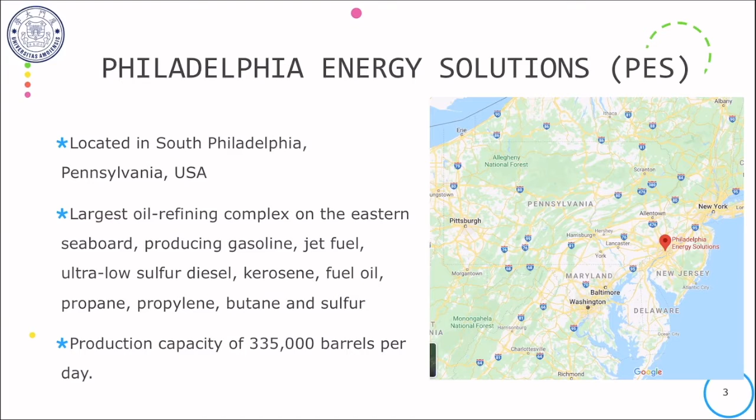Philadelphia Energy Solutions, in short PES, was located in South Philadelphia, Pennsylvania, United States. PES owned the largest oil refinery complex on the eastern seaboard, producing gasoline, jet fuel, ultra-low sulfur diesel, kerosene, and many other petrochemical products, with a nameplate capacity of 335,000 barrels per day.

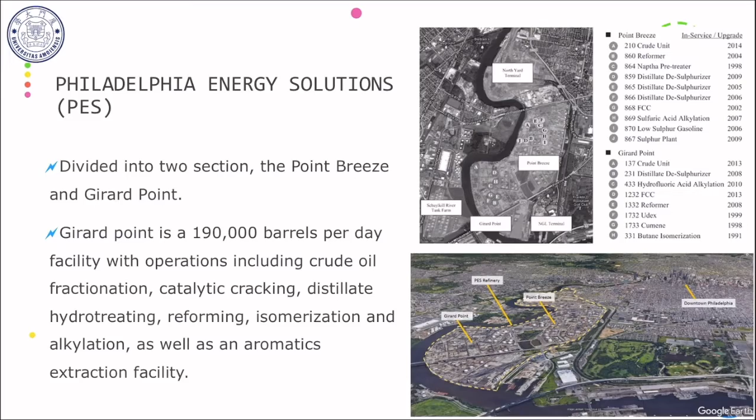This hydrofluoric acid alkylation unit is used in the petroleum refinery to convert isobutane and alkenes into alkylates, which is used to make gasoline. In brief, propane, butane, butylene, and isobutane from the upstream processes will be sent to the treater feed surge drum V1.

Before being transferred to the alkylation unit, the feed will pass through the caustic scrubber and deethanizer to remove hydrogen sulfide and ethane. Once in the alkylation unit, the alkenes react with isobutane in the presence of hydrofluoric acid catalyst, creating alkylates. Alkylates and remaining hydrocarbons separated from the hydrofluoric acid catalyst in the hydrofluoric acid settler will then undergo downstream refining.

Overhead of the depropanizer containing propane product and hydrofluoric acid are condensed and separated in the overhead depropanizer accumulator. A section of hydrofluoric acid containing propane is returned to the column while the remainder is stripped free of acid in the propane stripper. The bottom of the propane stripper is acid-free propane product, which is treated with hot alumina to remove organic fluorides.

It is then cooled and treated with potassium hydroxide pellets to remove traces of hydrofluoric acid and water. The distillate and section of alkylates and hydrocarbons from the hydrofluoric acid settler will then enter the isostripper. Overhead isobutane and propane will be recycled for alkylation, while the bottom will enter the debutanizer to separate alkylates and butane product.

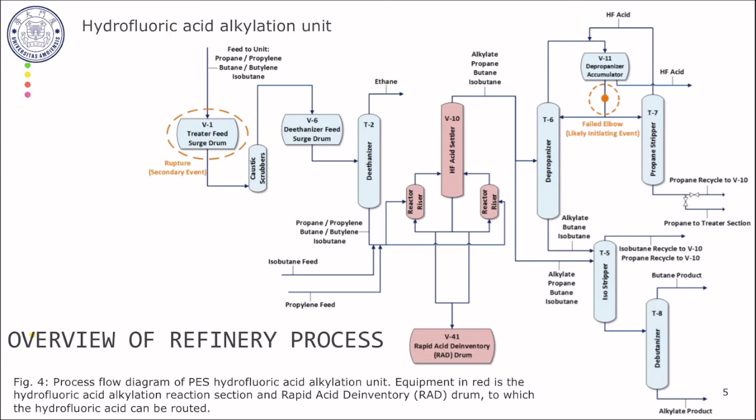On June 21, 2019, at 4:02 a.m., during the plant's normal operation, a major process loss of containment caused a fire and explosion at the 433 hydrofluoric acid alkylation unit in Girard Point.

Post-investigation shows that the rupture of the elbow between the depropanizer accumulator and the depropanizer distillation column appeared to be the initiating event causing the process fluid release. This fire raged for more than 24 hours, releasing 5,239 pounds of deadly hydrofluoric acid into the air.

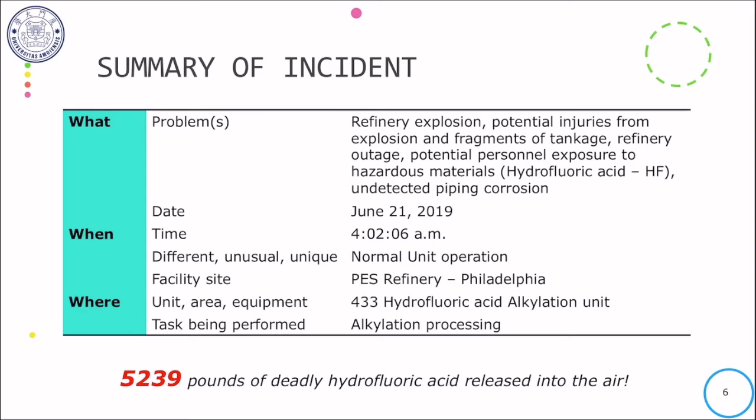Next, I will explain the incident timeline in detail. This explosion incident timeline was summarized in the table here. During the early hours of Friday, June 21st, the hydrofluoric acid alkylation unit was reported to be operating normally.

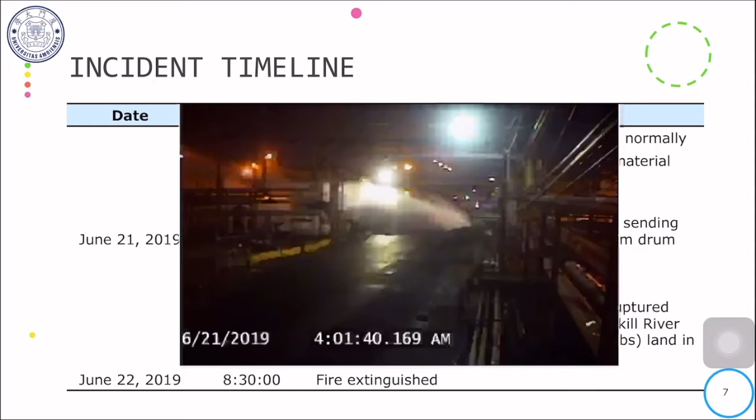Right after 16 seconds past 4, there was a sudden loss of containment causing flammable process fluid containing hydrofluoric acid to release from the PES alkylation unit, forming a ground-hugging vapor cloud. At 4:02:06 a.m., the flammable vapor cloud ignited, causing a large fire in the alkylation unit.

After 30 seconds, the control room operator activated the RAD system, which de-inventoried the bulk hydrofluoric acid from the hydrofluoric acid settler to the RAD drum.

At 4:15 a.m., during the ongoing fire, an explosion occurred in the alkylation unit. A second explosion in the unit then occurred after 4 minutes.

At 4:22 a.m., a third and the largest explosion occurred when the V1 treater feed surge drum, containing primarily butylene, isobutane, and butane, violently ruptured.

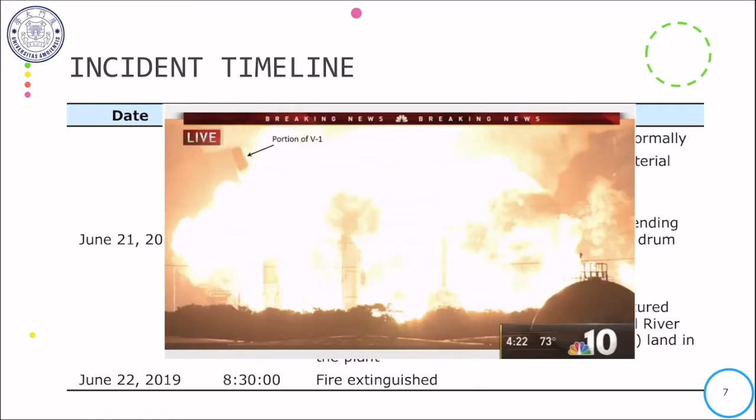A fragment of the vessel weighing approximately 38,000 pounds flew across the Schuylkill River, and the other two fragments, one weighing about 23,000 pounds and the other about 15,000 pounds, landed in the PES refinery. This appeared to be a secondary event caused by the fire.

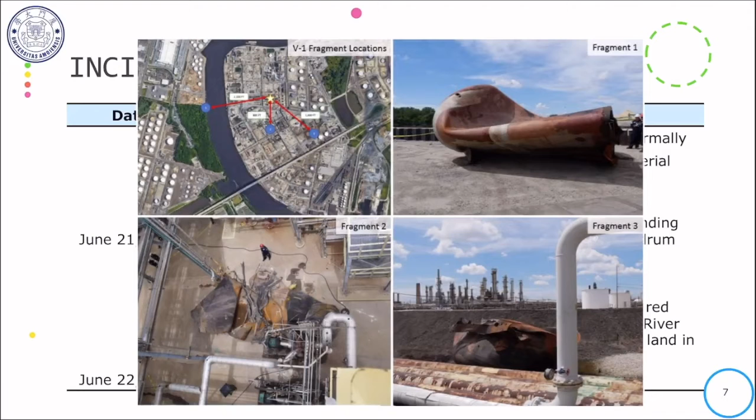The fire was extinguished the following day at about 8:30 a.m. This photo illustrates the actual scenario during the incident.

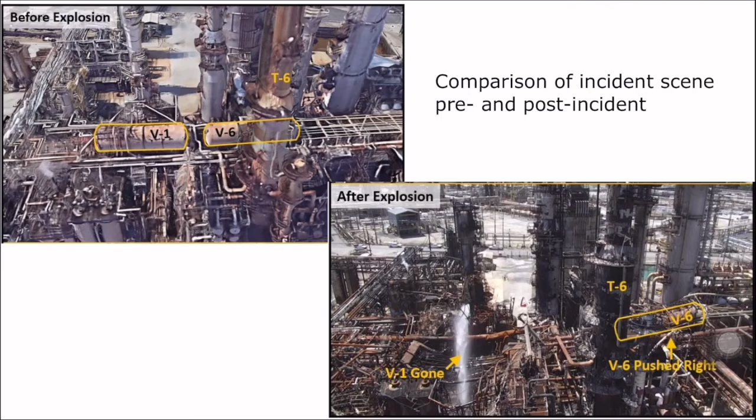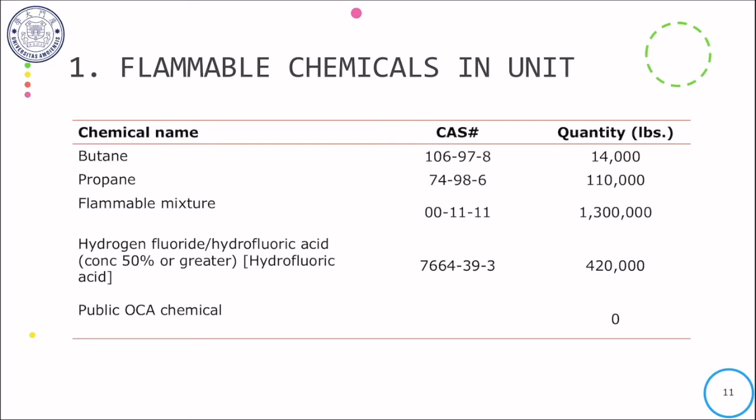Following that, I will share with you our findings on the technical details of the unit operations in the incident. The table here shows the chemicals involved in the unit sections, indicating that flammable chemicals are present in the unit. Prior to the incident, a latest hazard review was conducted on June 28, 2017, and the hazards identified and installed safety features on the unit sections are shown here.

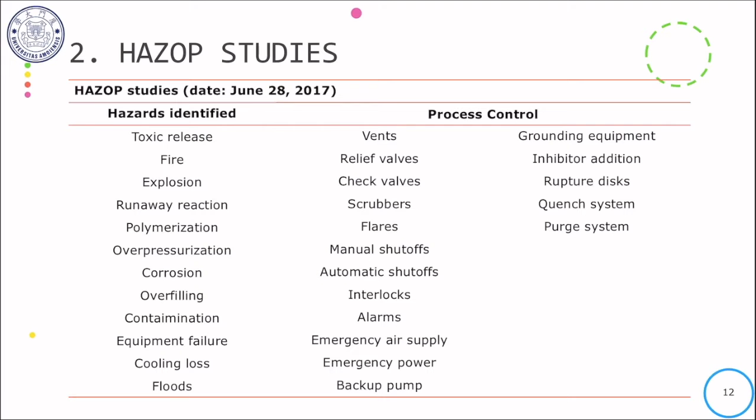Investigations by the United States Chemical Safety Board say the Philadelphia explosion occurred due to a corroded pipe elbow in the refinery alkylation unit. The elbow was part of the piping between the depropanizer accumulator and the depropanizer distillation column. During the incident, the piping was operated at a pressure of about 26.2 bar and a temperature of about 37.8 degrees Celsius. Approximate design compositions of the process fluid in the piping contained 94.7% propane, 2.5% hydrofluoric acid, and 2.8% additional hydrocarbon.

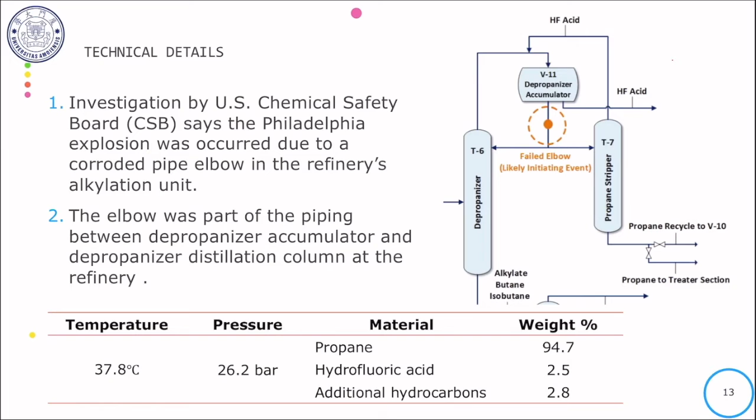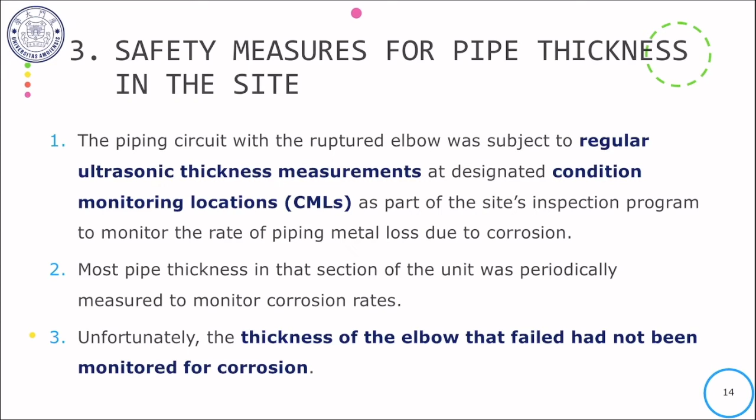Regarding safety measures for pipe thickness at the site, the piping circuit with the ruptured elbow was subjected to regular ultrasonic thickness measurements at designated condition monitoring locations (CML) as part of the site inspection program to monitor the rate of piping metal loss due to corrosion. Most pipe thickness in that section of the unit was periodically measured to monitor corrosion rates, but the thickness of the elbow that failed had not been monitored for corrosion.

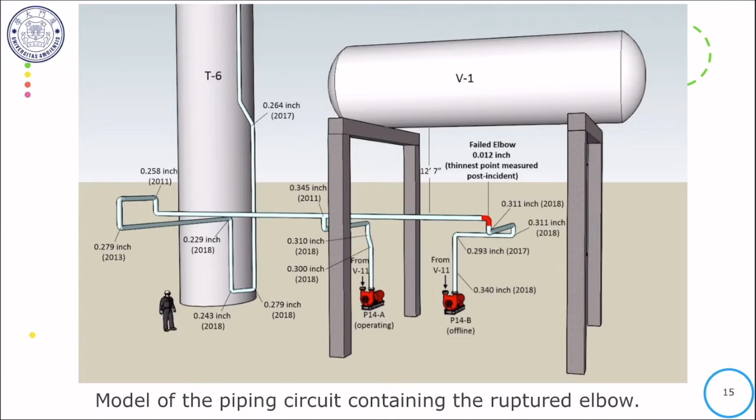This figure shows the model of the piping circuit containing the ruptured elbow. The most recent thickness measurements at designated CML locations are shown, along with the year of each measurement. At the time of the incident, the elbow was on the discharge outlet piping from a pump that was not operating. This figure also illustrates that the treater feed surge drum was directly above the ruptured elbow. The ruptured pipe elbow was found after the incident.

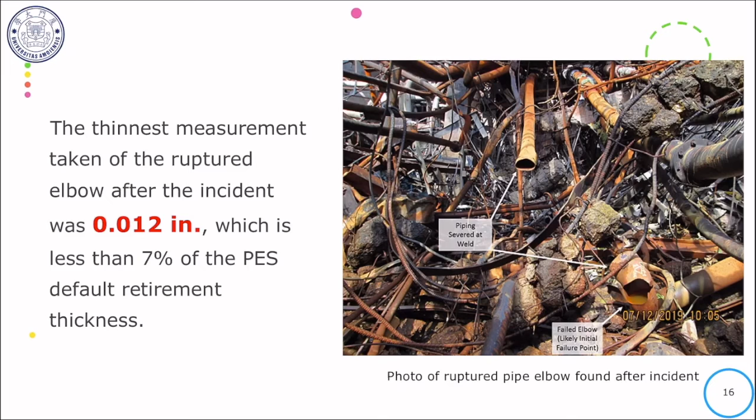The thinnest measurement taken of the ruptured elbow after the incident was only 0.012 inch, approximately 0.3 mm, which is less than 7% of the PES default retirement thickness.

Detailed investigation on the ruptured elbow by CSB shows that the piping circuit containing the ruptured elbow was installed in 1973. The piping circuit was constructed to meet the 1965 version of ASTM A234 grade WPB material specification. ASTM stands for the standard specifications for factory-made wrought carbon steel and ferritic alloy steel welding fittings, while WPB is a steel grade in which W is weldable, B is grading B, and P is pressure, thus referring to the minimum yield strength of the material.

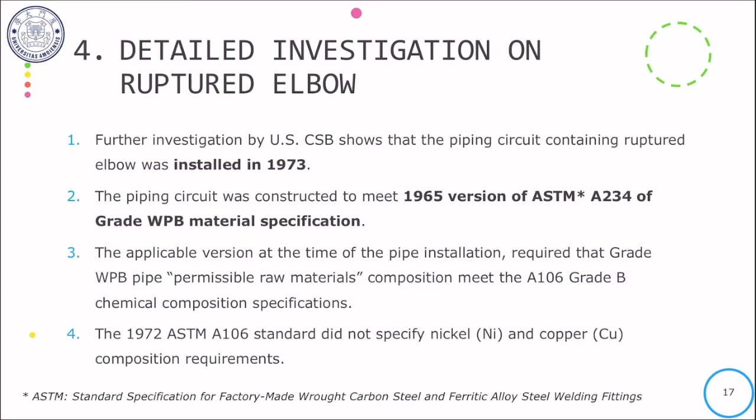The 1965 version of ASTM A234, at the time of pipe installation, required that grade WPB pipe permissible raw material compositions meet the A106 grade B chemical composition specifications. However, the 1972 ASTM A106 standard did not specify nickel and copper composition requirements. In 1995, ASTM A234 began to specify nickel and copper compositions as well as compositions of other elements.

The WPB composition requirements from 1972 and 1995, and the chemical compositions of the ruptured elbow and the adjacent elbow, are shown in the table. Unfortunately, the nickel and copper content of the ruptured elbow exceeded the updated A234 WPB requirements specified in 1995, as highlighted in pink.

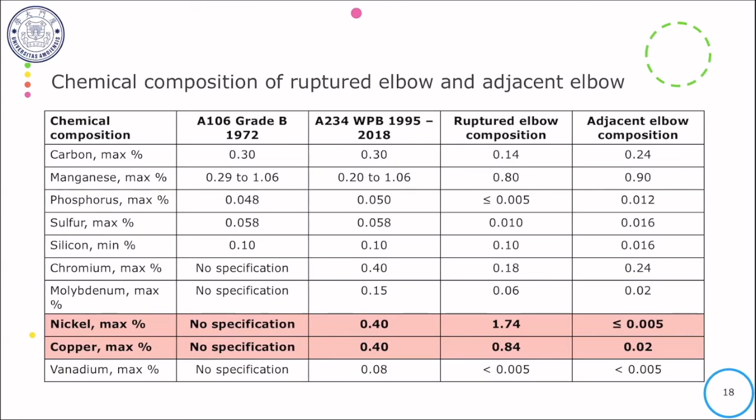American Petroleum Institute recommended practice 751, safe operations of hydrofluoric acid alkylation units, states that hydrofluoric acid corrosion has been found to be strongly affected by steel compositions, and localized corrosion rate can be significantly affected by local chemistry differences. They also state that combinations of carbon content and residual elements content could increase non-uniform corrosion by up to 5-fold compared to baseline measured corrosion rates. In layman's terms, this means high nickel and copper compositions in the carbon steel cause the pipe to corrode at a faster rate than those with lower percentages in the process with hydrofluoric acid.

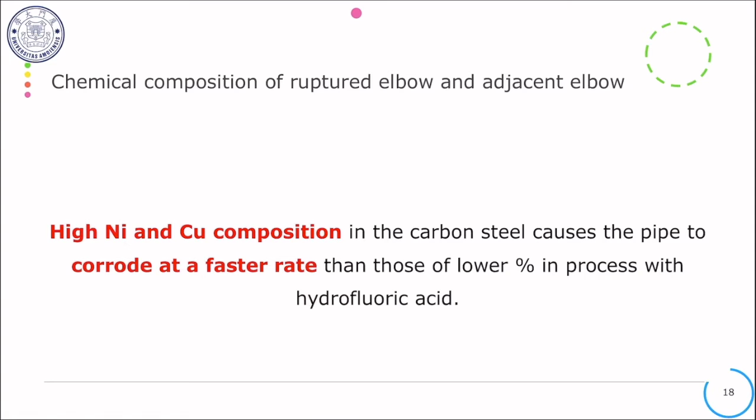That's all from me. Next, I will pass to Kaki to continue on part 3.

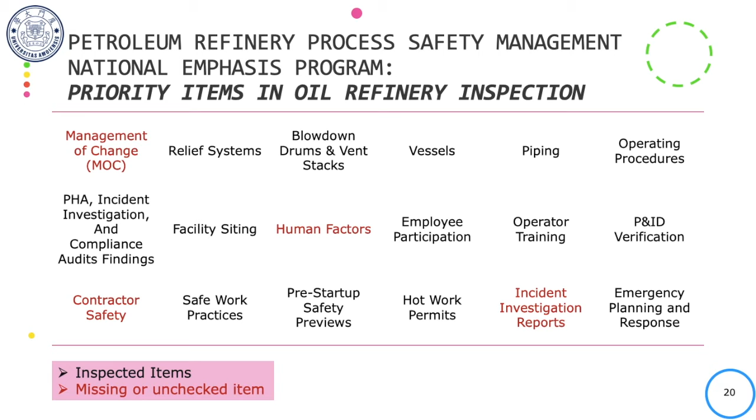So moving on, we look at some of the basic standards and enforcement laws regarding labor. This means it's about the labor forces, the employers, and the employees themselves being related. So first up would be the OSHA standards.

OSHA standards is actually not a very strange term, and I think we are very familiar with this as we've learned this before. So OSHA standards is actually the general duty clause of the OSHA Act, which is the law that created OSHA. This requires employers to provide workers with a safe workplace. Basically, we are guided by this OSH Act to create a workplace that is safe for all employees.

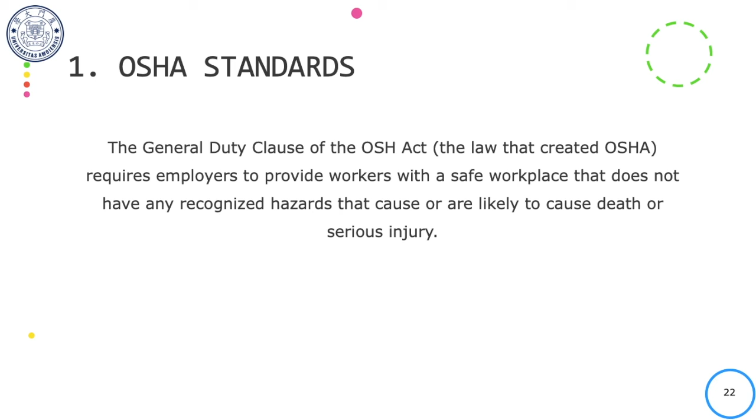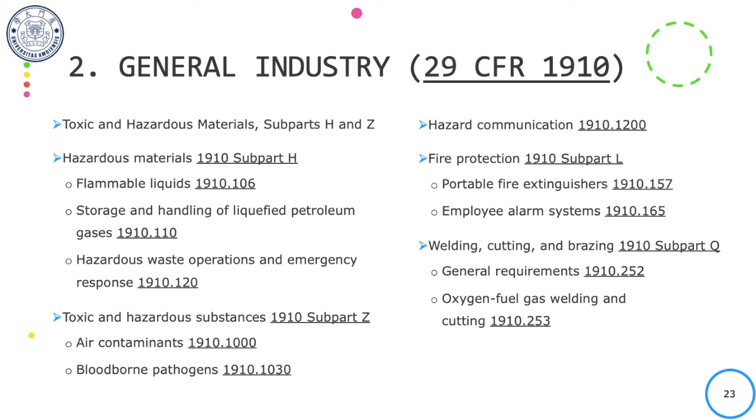So next would be the general industry. This general industry 29 CFR 1910 is actually also a guideline given by OSHA, but instead of the OSH Act, this is called general industry guidelines. These are some of the guidelines which contain a lot of subparts. Some of the subparts I've highlighted here are those regarding toxic hazardous materials, and some related to fire protection and hazard communication, which is very important in the case of an incident or anything dangerous happening inside the refinery plant. So moving on will be the letters of interpretation.

What letters of interpretation means is actually also a sort of guideline provided by OSHA. In this case, it's provided by OSHA to further guide the refinery plant employers when they're trying to design or get their plant working, on what they need to keep in mind or keep track of as time goes.

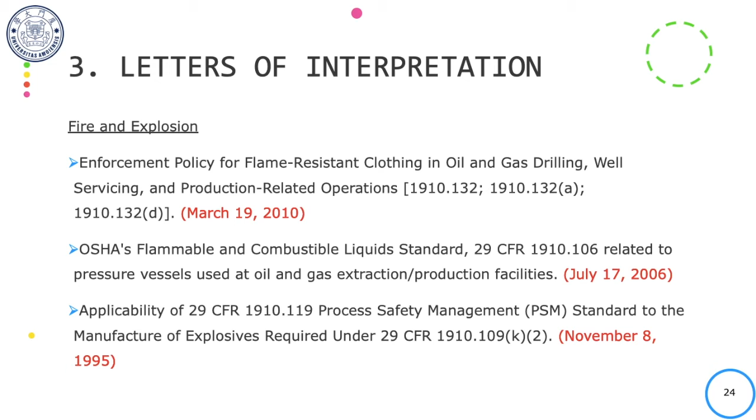So in the letters of interpretation, there are also a lot of subparts. Some of the subparts I highlighted regarding this incident are the fire explosion guidelines. In the case of fire explosion, there are a few guidelines or policies you have to follow using these letters of interpretation - some of it being the clothing of the workers, what you're going to do with liquids which are flammable and combustible, and some of the PSM elements you're supposed to have in the case of any combustible or flammable liquids existing in your refinery plant.

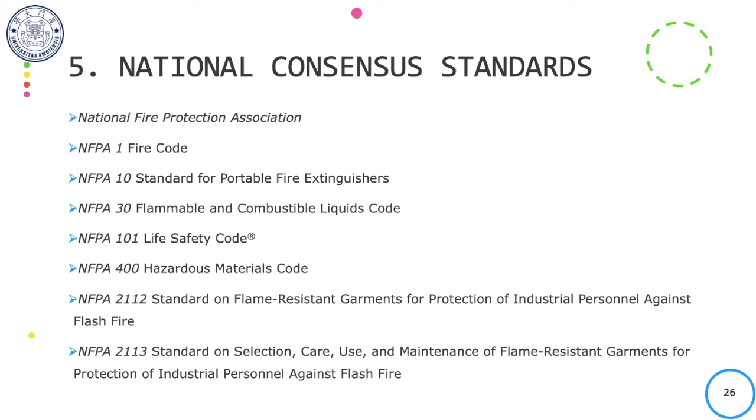Some of the other more important ones will be the national consensus standards. These are standards not set by OSHA themselves, but actually standards set nationally regarding the conduct of a refinery plant. So we can look at the National Fire Protection Association, which gives NFPA 1, 10, 30 - most of these are related to fire protection and some of the hazardous materials that will cause fire. So moving on will be the API, the American Petroleum Institute.

Like what I said just now, API is actually voluntary guidelines that exist to provide guidance for the refineries, but they don't necessarily have to follow it. They are just advised to do it, but most refineries are actually following the guidelines because it's a safe practice in engineering ethics and such.

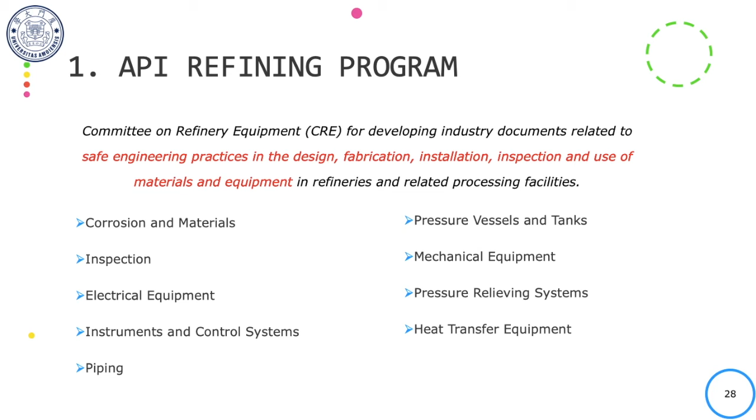So first up will be the API refining program. This refining program is actually developed by a committee that gives the practice in the design, fabrication, installation, inspection, and all the other equipment. This includes the inspection of equipment, some of the pipings, the corrosion, which are all crucial in the running of a refinery. Next up will be some examples of API standards that I've listed here.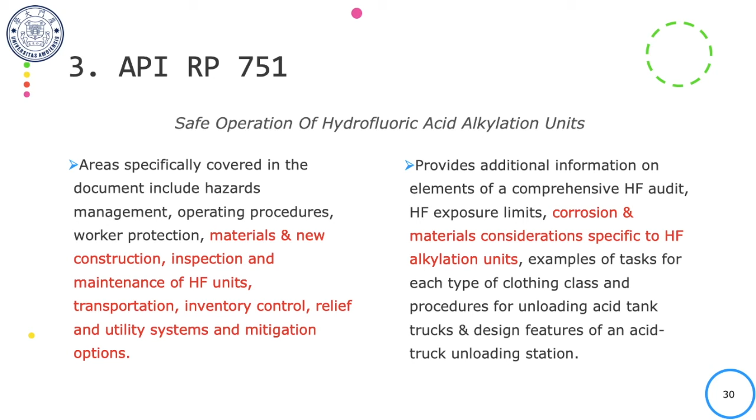Now, at first glance, this is actually a standard that makes the world look greener, or makes the production look cleaner, in a sense. But at the same time, this also skyrockets the cost when you're producing a fuel.

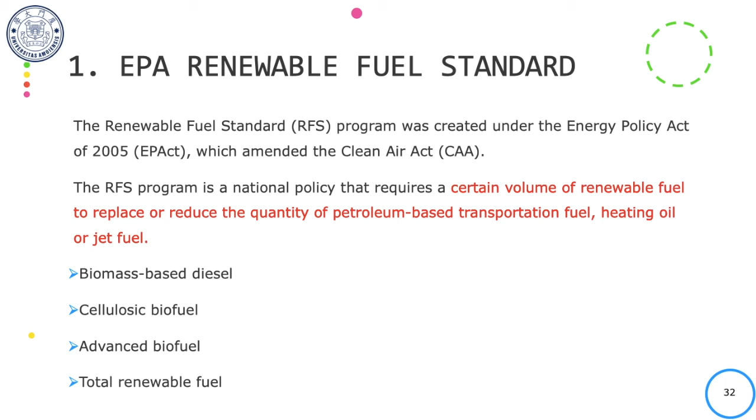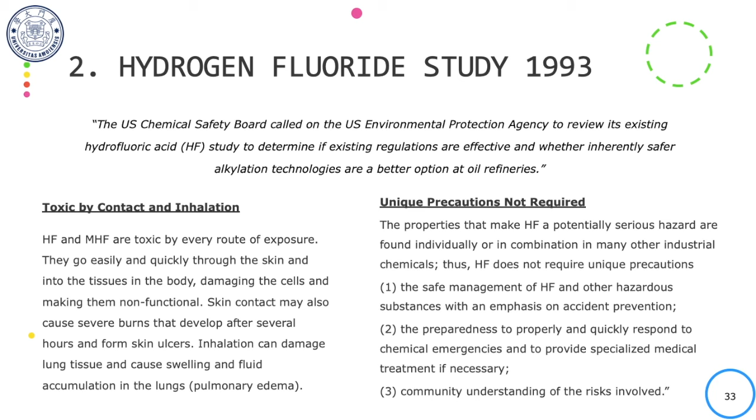So during 1993, it was stated that HF is toxic by contact and inhalation. It's very toxic, but despite being very toxic, these properties did not call for any unique precautions stated by EPA. The reason for this was that during 1993, most refineries or most fuel production units were relying on HF.

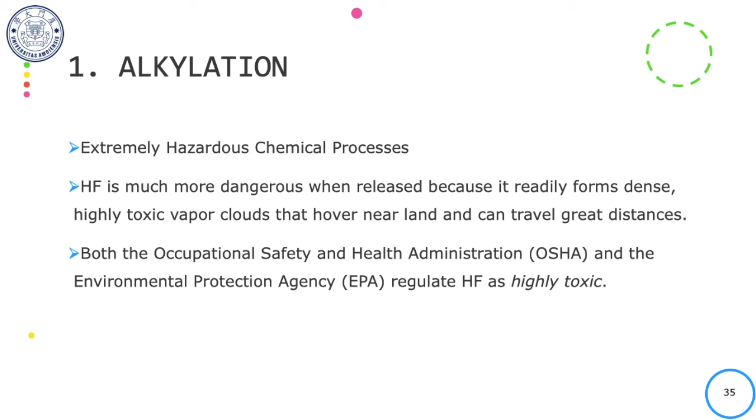So let's move on to HF alkylation. Alkylation is actually a very hazardous chemical process. When you're using HF, this process gets even more dangerous because HF can readily form dense, highly toxic vapor, which is what happened in this incident.

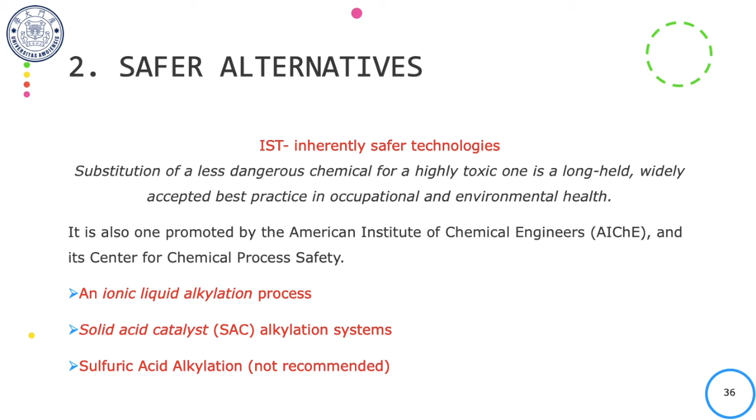Now sulfuric acid alkylation was one of the other major refinery options in the US, but it's actually still not recommended because sulfuric acid is also very toxic and hazardous. Although there are much safer technologies being introduced throughout the years, there are still many small and major refineries relying on HF alkylation.

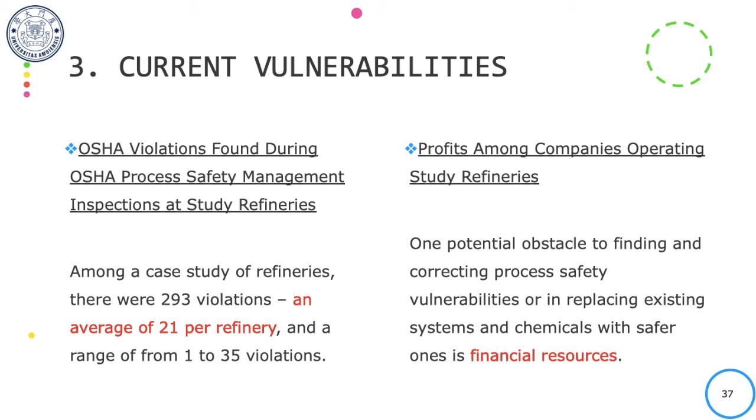The second reason is the profits gained by using HF alkylation. As mentioned above, HF alkylation has been the more traditional and cheaper approach in fuel or refinery production. So by maintaining HF alkylation, you do not need to invest in new safer technology.

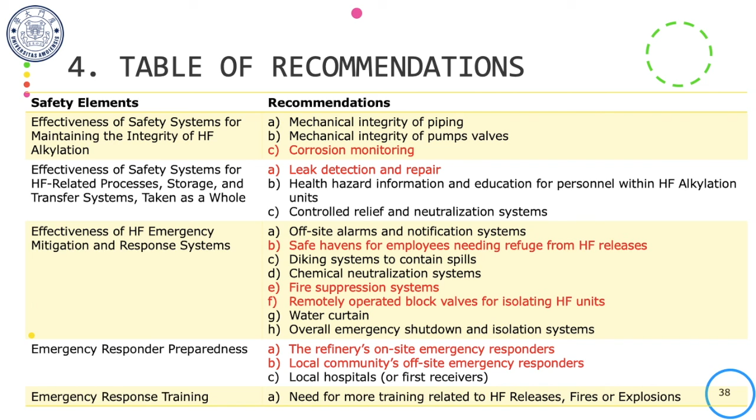Next, the fire suppression system should also be improved. Also, remotely operated block valves should be included in isolating the HF unit so that the HF units and pipelines can be isolated immediately in case of any leak detection or vapor cloud forming.